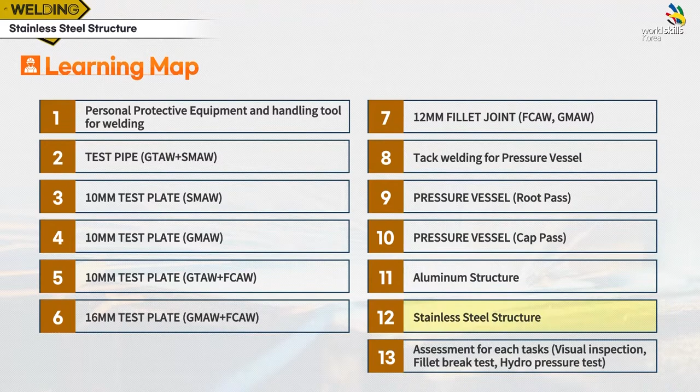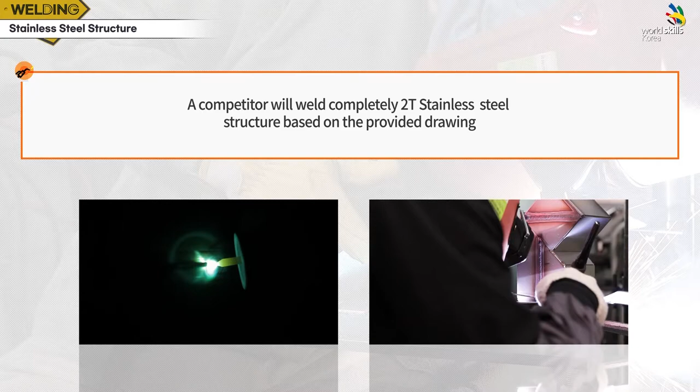Here's the training objectives on this task: to weld a stainless steel structure completely based on the provided drawing. Task: to make a stainless steel structure using 2 mm stainless material. Objective: to weld the stainless structure completely based on the provided drawing.

Goals: to strengthen welding skills for stainless structure. To make sound welds without any defects, such as porosity, burn-through, oxidation, etc. To interpret drawings accurately, including the front view, top view, side view, etc.

Materials: the stainless steel structure uses a 2 mm plate, 250 mm high, 200 mm long, and 200 mm wide. Welding process is GTAW stainless steel. Welding rod is T308, 1.6 mm and 2.4 mm. Shielding gas is argon 99.9%.

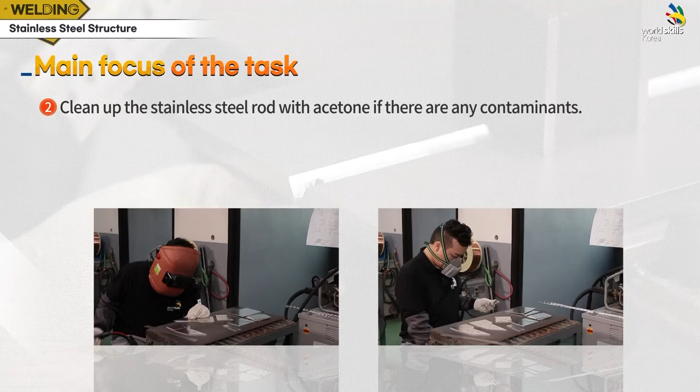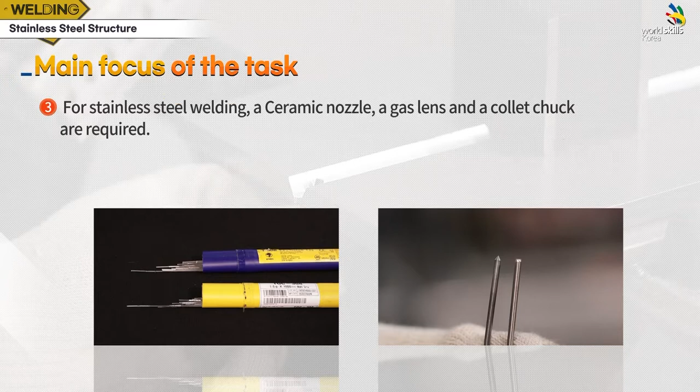Main focus of the task: make sure not to damage the base material. Clean up the stainless steel rod with acetone if there are any contaminants. For stainless steel welding, a ceramic nozzle, a gas lens, and a collet chuck are required. Prepare the electrode tip sharp as a pointed end.

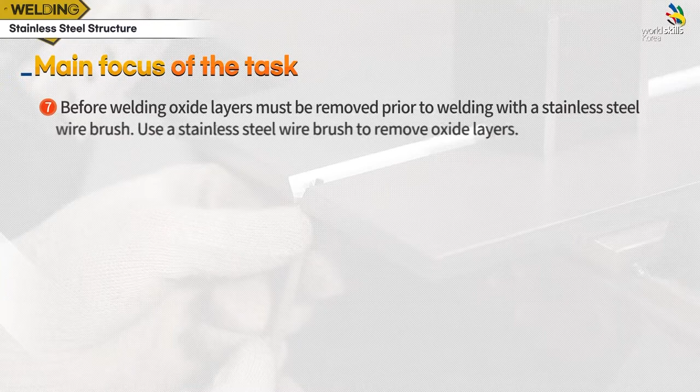Prepare water in a bucket bigger than the stainless steel structure and use it for cooling down the base material heated during welding. Make sure to weld the base material without any misalignment. Before welding, oxide layers must be removed with a stainless steel wire brush.

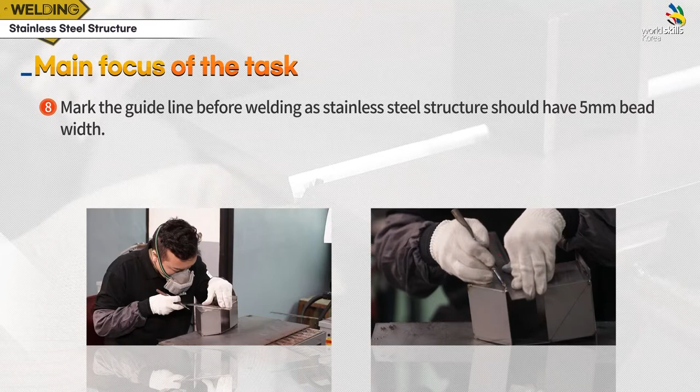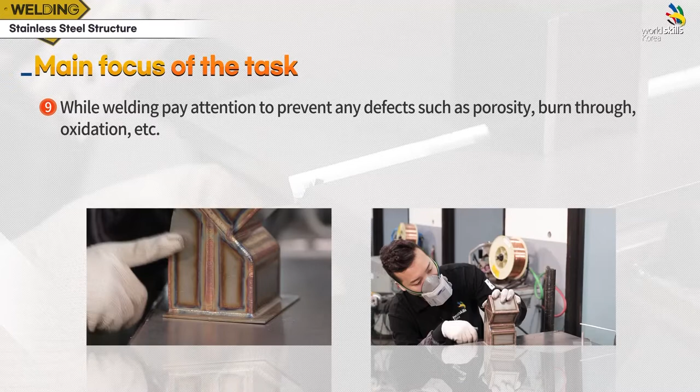Mark the guide line before welding, as the stainless steel structure should have a 5 mm bead width. While welding, pay attention to prevent any defects such as porosity, burn-through, oxidation, etc. Please check the preparations and tools for this training.

Precautions. Before starting welding, check if there is anything wrong with the material, such as incorrect size or machining errors. If so, request to replace it. Once welding starts, it is not allowed to replace the materials. A 2% thorium electrode is used for stainless steel welding. Use an electrode sharpened to a pointed end because DC is used for stainless steel welding.

When tack welding, alignment is more important than anything else. Check for any misalignment with a steel ruler and repeat checking even after the tack welding is done. When the tungsten electrode touches the base material, it will get a blackish oxidation. Keep the tungsten electrode away from the base material. Keep only about 1 to 2 mm distance when making tack welds; if it's too far, it will not penetrate.

Do not make any gaps between the bottom plate and the structure. Hold tight to make tack welds without any gap. Before getting into the main welding, remove the oxide layers thoroughly with a stainless steel wire brush.

Argon gas purging should be supplied to the inside of the stainless steel structure to protect the welding beads from oxidation. Use 99.9% argon gas and supply it to the inside of the structure during the entire welding. The purging gas flow rate to protect the structure inside is 5 liters per minute. For the first weld, the shielding gas should be provided before starting the arc. When the weld joint is shielded by the gas, proceed with welding by starting an arc.

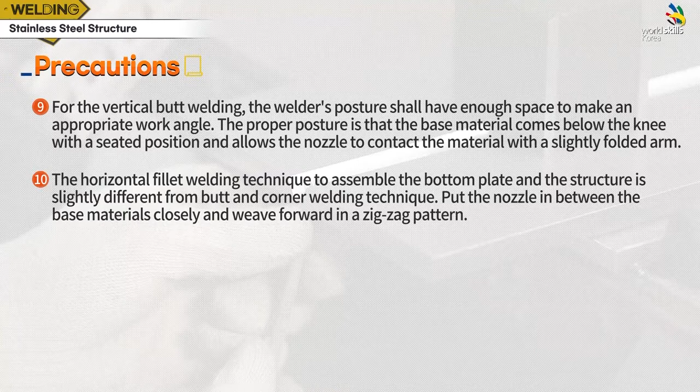The horizontal fillet welding technique to assemble the bottom plate and the structure is slightly different from the butt and corner welding technique. Put the nozzle in between the base materials closely and weave forward in a zigzag pattern. After finishing the arc, do not lift up the welding torch until the gas post flow has finished.

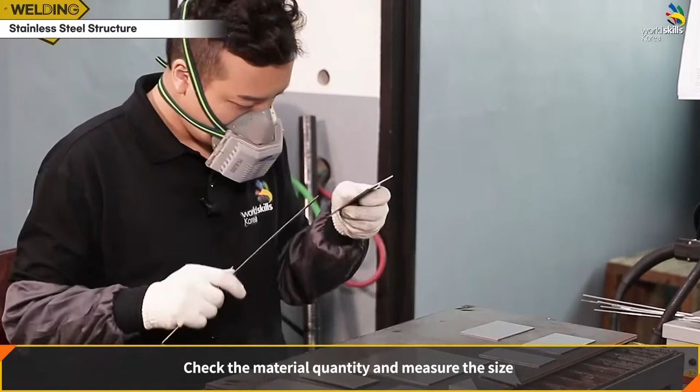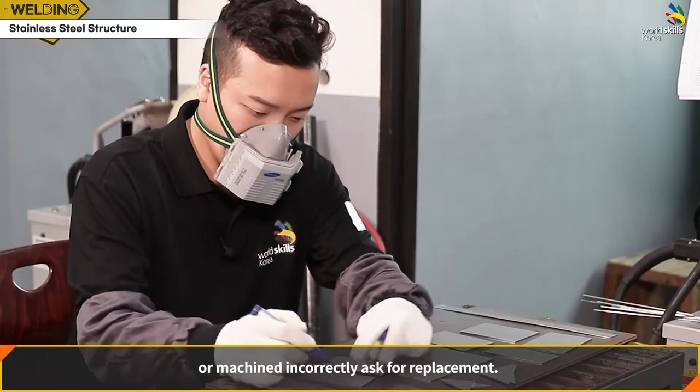Preparation of base material weld joints. Review the drawing and confirm all parts of material are given. Check the material quantity and measure the size. Prior to welding, if there is any material with the wrong size or machined incorrectly, ask for replacement. After starting welding, it is not allowed to replace the parts.

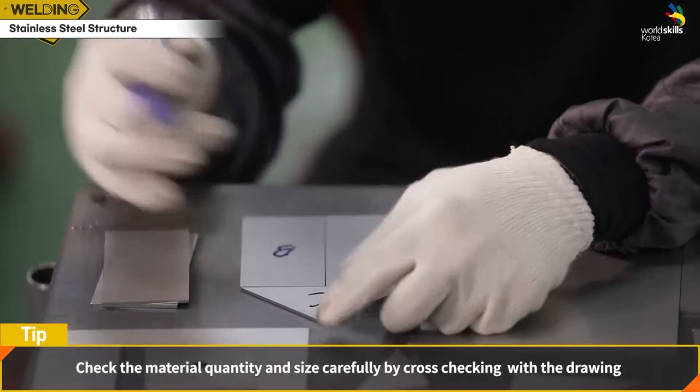Check the material quantity and size carefully by cross-checking with the drawing. Mark which part of the structure each material corresponds to against the drawing. Mark the location directly on the materials according to the drawing with a paint marker to avoid confusing the front and back panels of the plates.

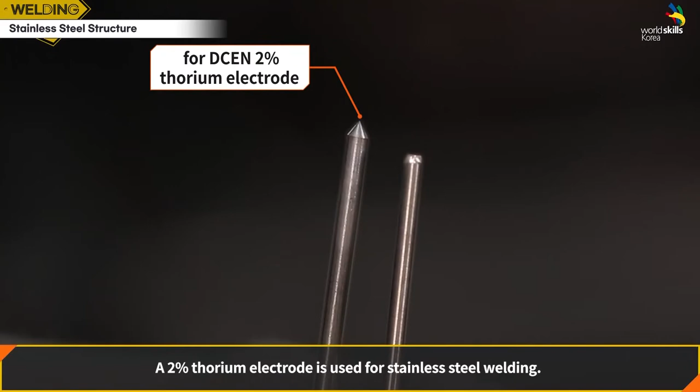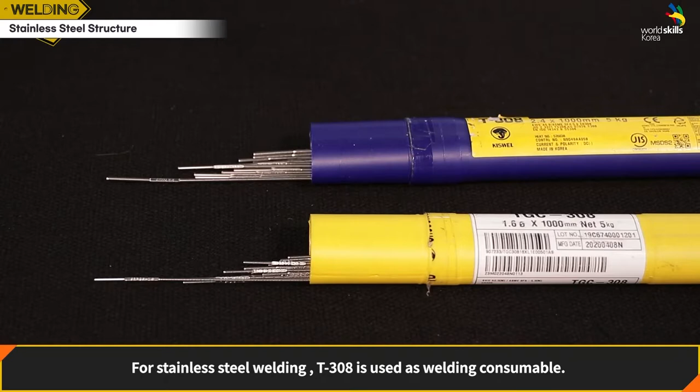A 2% thorium electrode is used for stainless steel welding. Because DCEN is used, sharpen the electrode tip to a pointed end. For stainless steel welding, T308 is used as the welding rod. It shows an appropriate amount of ferrite content when deposited, so it has excellent crack resistance and mechanical properties. For this task, 1.6 and 2.4 mm filler metal will be used.

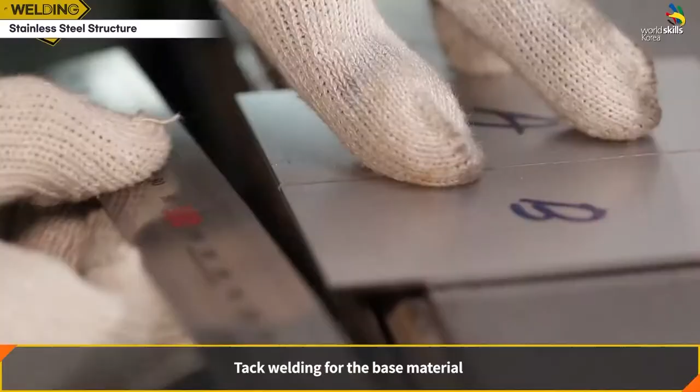Tack welding for base material. While tack welding, maintaining an alignment is the most critical. Check the alignment with a steel ruler and make tacks at both ends. Set the current about 80 ampere. The gas flow rate 10 liters.

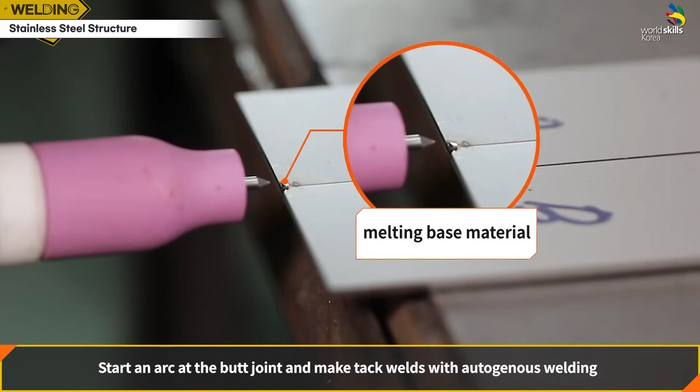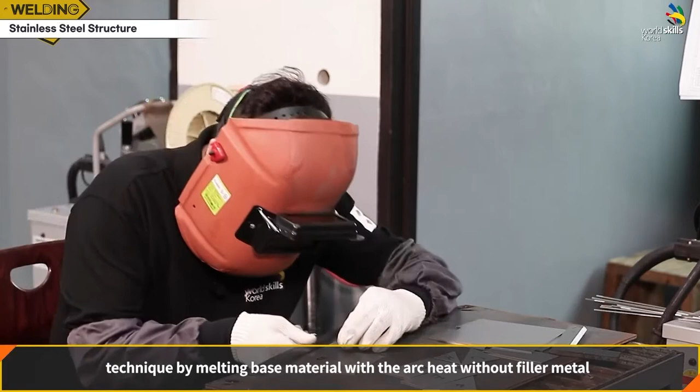Make tack welds according to the drawing with provided materials. Start an arc at the butt joint and make tack welds with autogenous welding technique by melting base material with the arc heat without filler metal. After tack welding, check if the level of the base material is even. Check repeatedly if there is any distortion with a steel ruler.

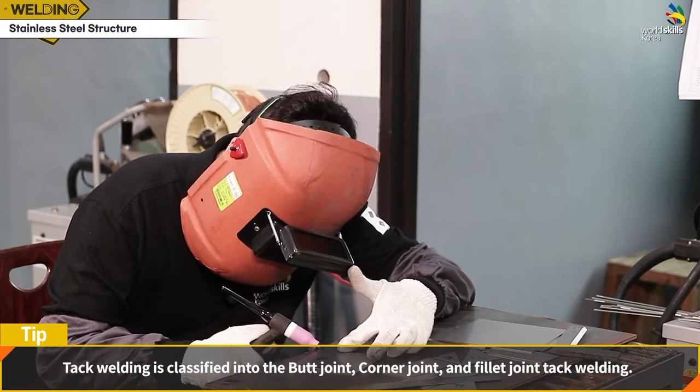Tack welding is classified into the butt joint, corner joint, and fillet joint tack welding. Tack welding from a side view, front view, and top view in order. After tack welding, check if there are any gaps between the base materials. It is important to make an alignment and keep no gap to avoid a burn-through.

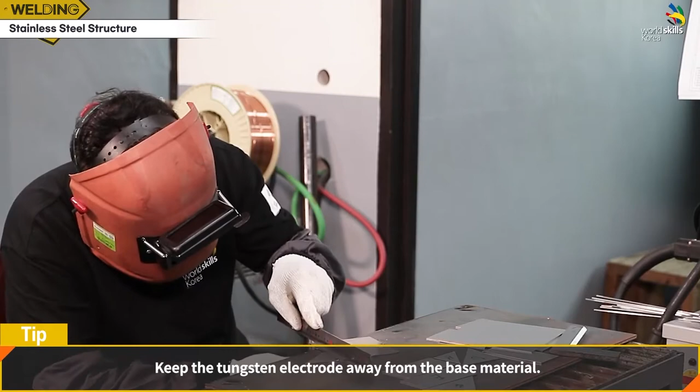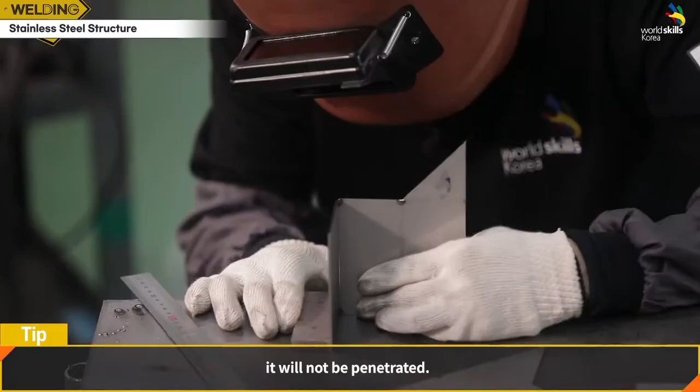When a tungsten electrode touches the base material, it will get a blackish oxidation. Keep the tungsten electrode away from the base material. Keep only about 1 to 2 millimeter distance and make tack welds, because if it's too far, it will not be penetrated. For corner joint, tack weld precisely to avoid the gap between the plates.

Tack weld holding the plates with a hand and then align the right angle with a square gauge. If it's not a right angle, correct the angle by bending or flattening material with hands. The assembly sequence is similar to the one for aluminum welding.

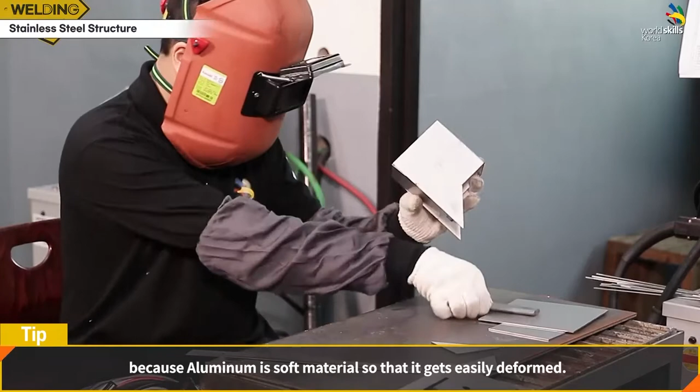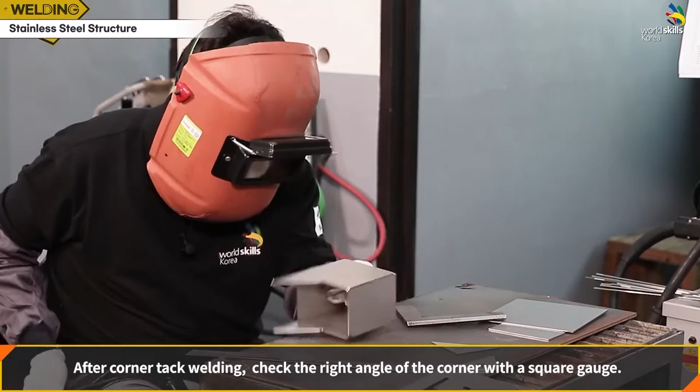The welder is welding tacks by holding material without any special fixture at the moment. Fixtures like G-clamp could be used, but pay extra care because aluminum is soft material so that it gets easily deformed. After corner tack welding, check the right angle of the corner with a square gauge. If it's a butt joint tack welding, make 2 tack welds at the end and middle, respectively. Whenever tack welding finishes, check the right angle of the corner with a square gauge.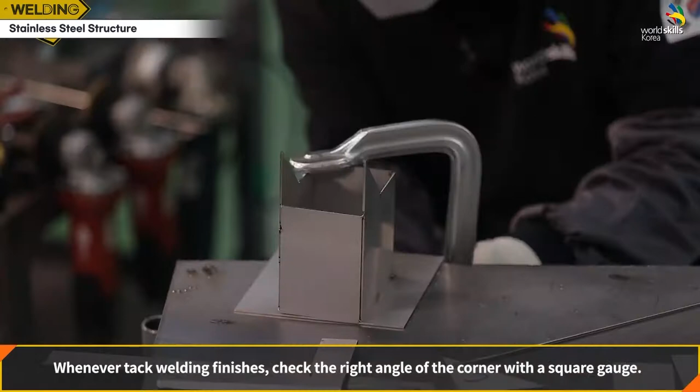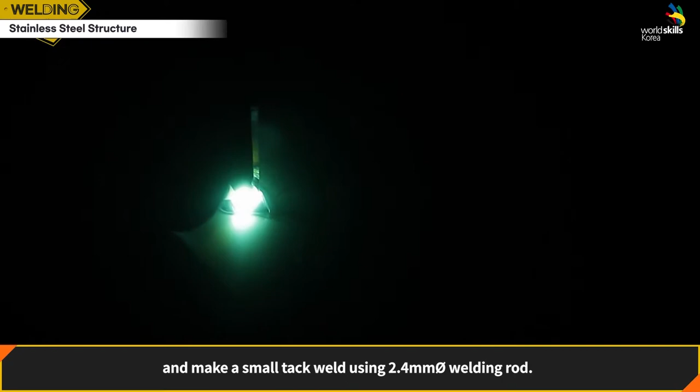In order to tack weld the bottom plate and the structure, hold the structure with a G-clamp. Do not make any gaps between the bottom plate and the structure. Hold tight to make tack welds without any gap. First, preheat the bottom plate with the arc heat, then move up the arc and make a small tack weld using 2.4 millimeter welding rod. When tack welding the base plate, it is necessary to wait 4 to 5 seconds until the molten metal cools down before removing the torch.

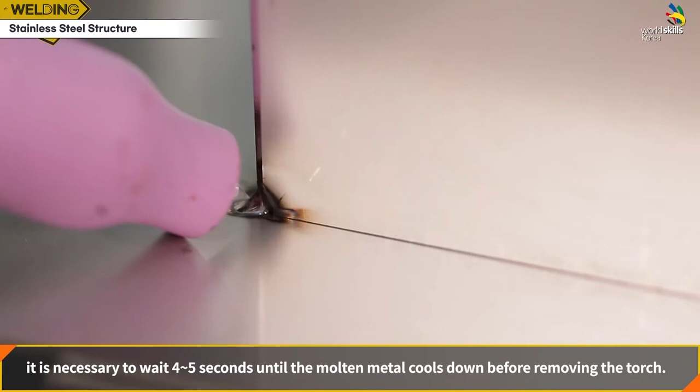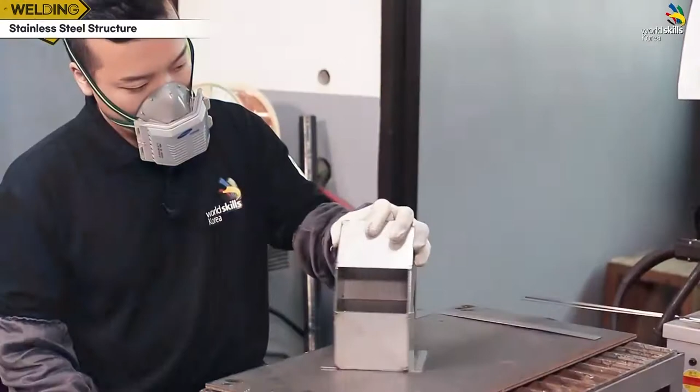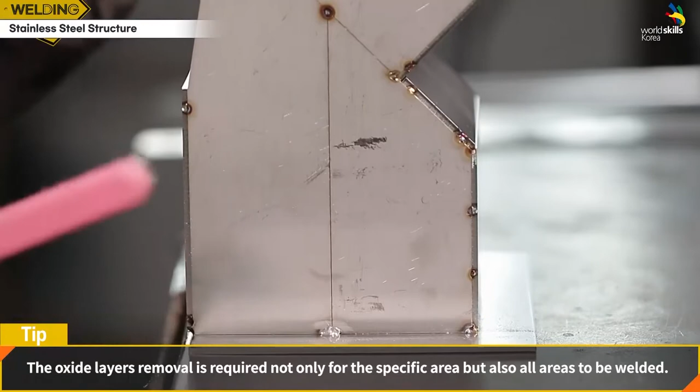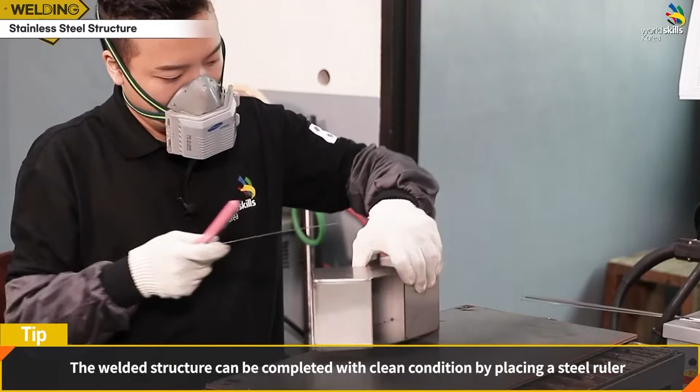Stainless steel welding. The oxide layers must be removed prior to welding with a stainless steel brush. Stainless steel brushing can remove not only the oxide layers, but also other contaminants such as cutting fluid, oils, and so on. The oxide layer removal is required not only for the specific area, but also all areas to be welded. Do not miss the butt joint part. The welded structure can be completed in clean condition by placing a steel ruler next to the weld joint considering the bead width when removing oxide layers.

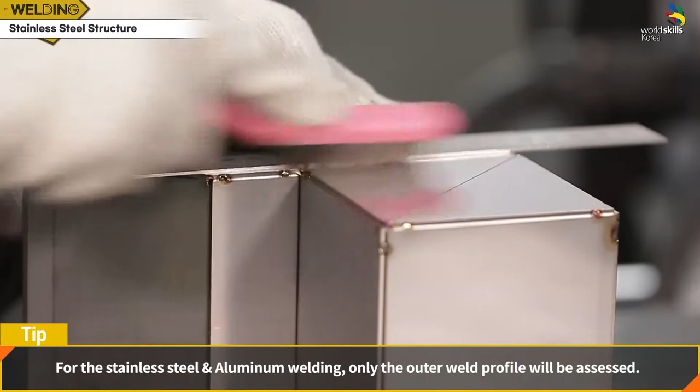For the stainless steel and aluminum welding, only the outer weld profile will be assessed. Pay special attention to the outer weld profile and other tasks. After removing aluminum oxide layers, mark the guideline with a marking needle considering the bead width. Mark the guideline for butt joint and fillet joint, except corner joint, since for the corner joint, the edge of material will be a guideline for welding. The marked line for the butt joint is the guideline in order to align the uniform bead width.

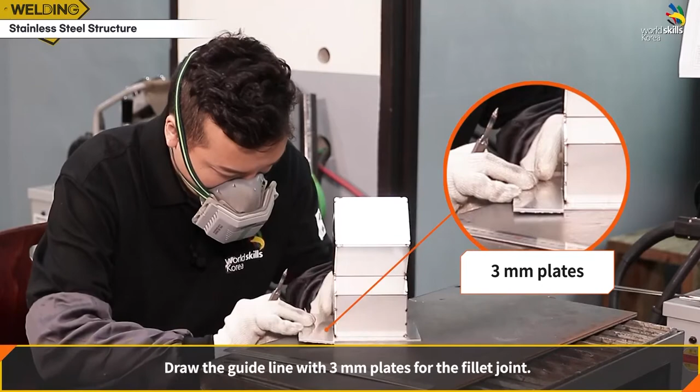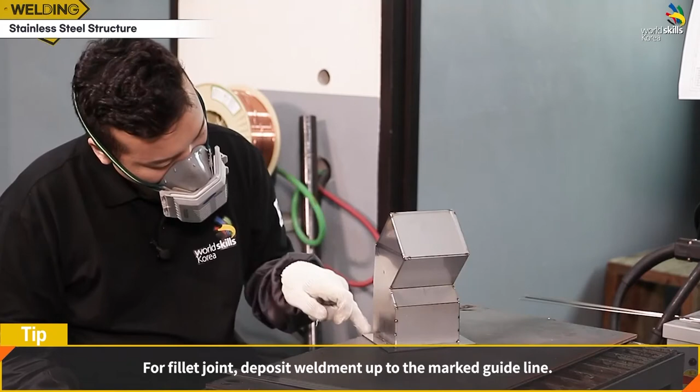Draw the guideline with 3 millimeter plates for the fillet joint. For fillet joint, deposit weldment up to the marked guideline. When weldment didn't deposit up to the guideline, a competitor will lose marks for undersize of fillet during the marking process.

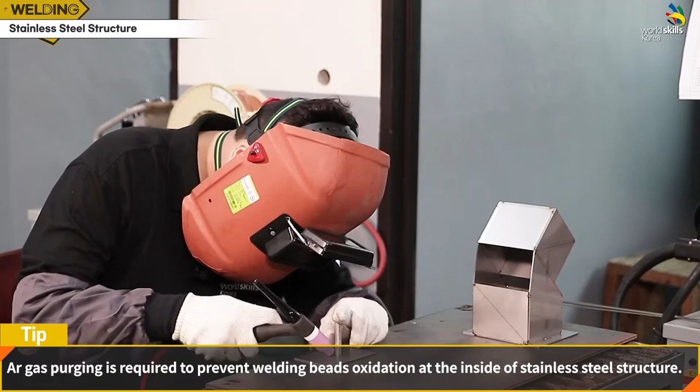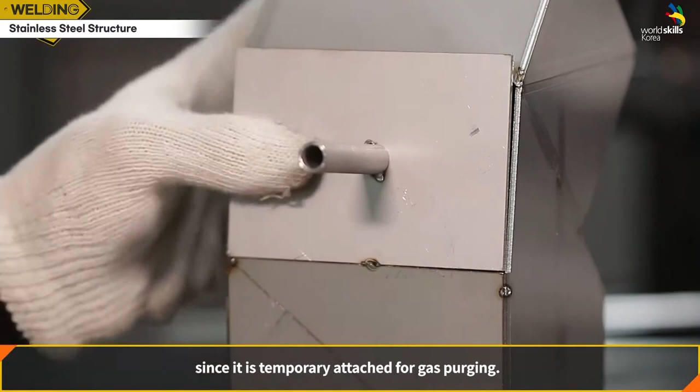Before starting this welding, stainless steel welding requires a shield work to prevent oxidation of the back bead. Supply 99.9% argon gas to the structure inside during the entire welding. Insert the tube into the opening in the cover plate. Make tack welds at the cover plate instead of complete welding, since it is temporarily attached for gas purging. This cover plate will be removed after welding completion. Fix it only to the extent that it doesn't fall off. Connect the argon gas tube to the tube connector.

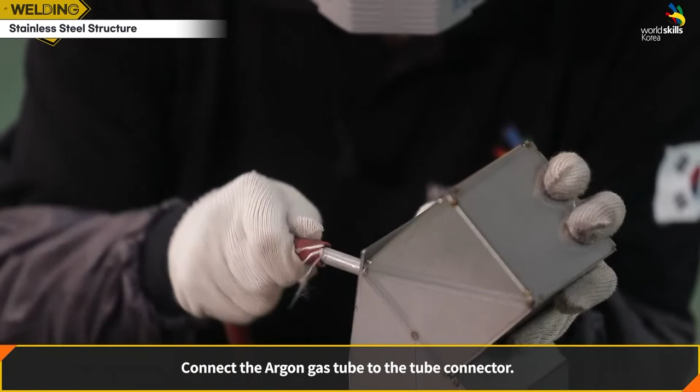Gas flow rate for argon purging is 5 liters per minute.

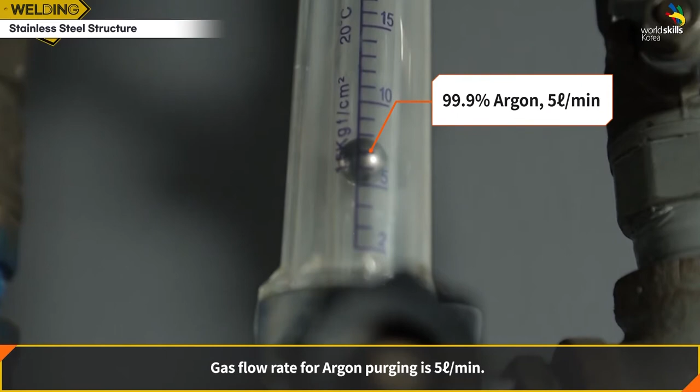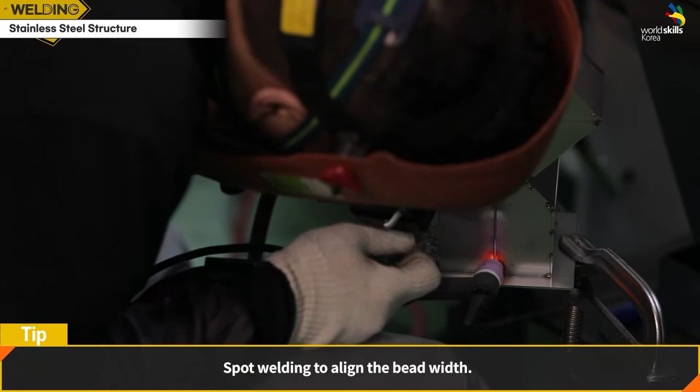Vertical butt welding. Start an arc from the bottom plate and move it to the top while welding. In the beginning, make 2 to 3 spot welds and keep the short arc length. Align the bead width with spot welds. A welder has drawn a 5 mm bead width line.

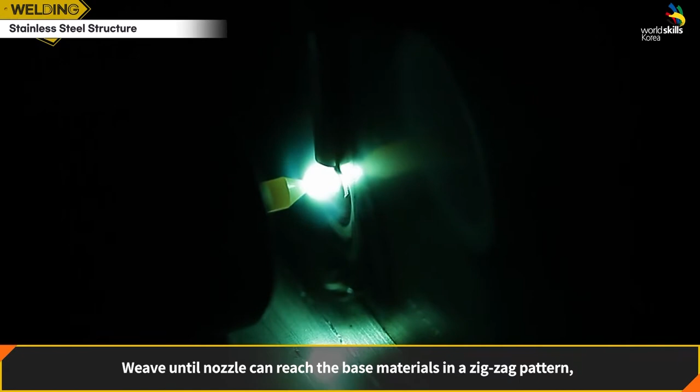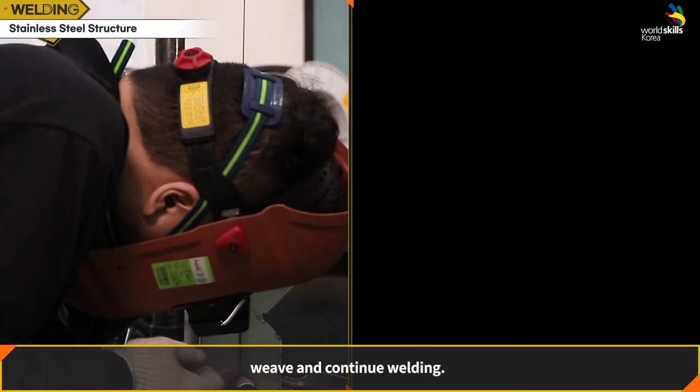Weave the nozzle until it can reach the base materials in a zigzag pattern and then pause the arc. When the posture is stable and the torch can maintain the travel angle, weave and continue welding. The proper posture is that the base material comes below the knee with a seated position and allows the nozzle to contact the material with a slightly folded arm. Continue spot welding until the torch work angle can be maintained.

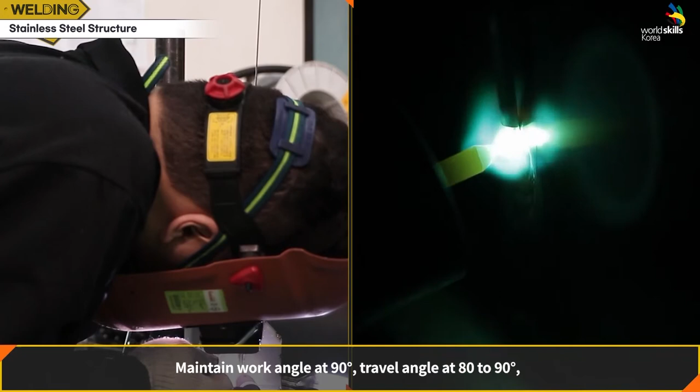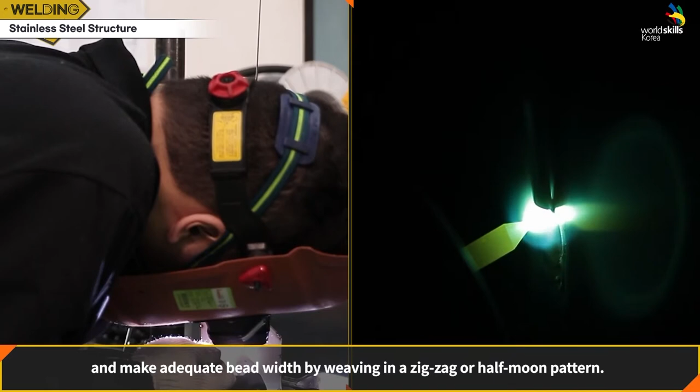Maintain work angle at 90 degrees, travel angle at 80 to 90 degrees, and the tilting angle of the welding rod at 10 to 20 degrees from the surface. Keep the short arc length so that the electrode does not touch the base materials and make adequate bead width by weaving in a zigzag or half-moon pattern. At this time, continue welding by feeding and pausing the filler metal repeatedly in front of the arc instead of feeding continuously.

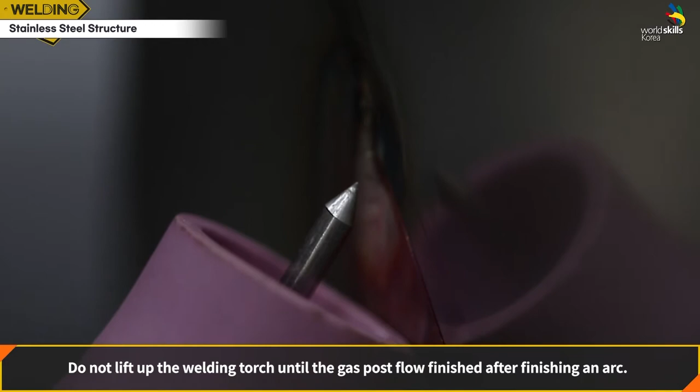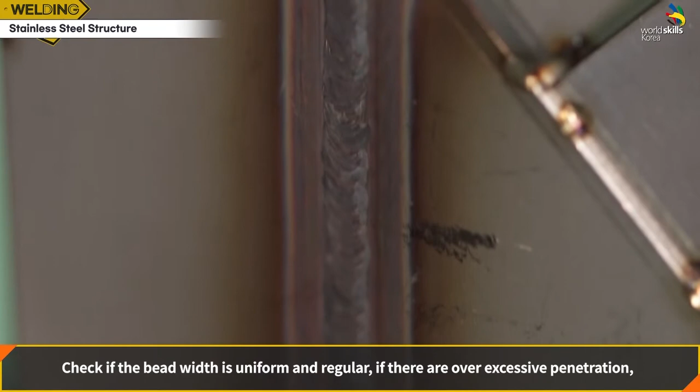Finish the endpoint with spot welding 5 mm ahead of the endpoint. Do not lift up the welding torch until the gas post flow has finished after finishing an arc. Check if the bead width is uniform and regular, if there is excessive penetration, and if there is any porosity or contaminant inclusion.

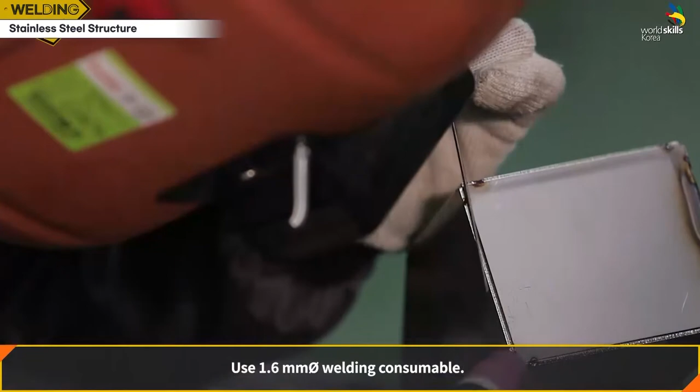Inclined vertical corner joint welding. Use 1.6 mm welding rod. With 2.4 or 2.6 mm, it may turn out too thick a weld bead. Use 60 to 65 ampere current. Continue welding by feeding and pausing the filler metal repeatedly in front of the arc instead of feeding continuously.

Maintain work angle 90 degrees, travel angle 75 to 85 degrees, and the tilting angle of the welding rod shall be around 10 to 20 degrees along the welding line. Depending on the welder's skills, the current can be partially adjusted. If the welding speed is fast, use high current. If it's not, lower the current a little bit. Do not lift up the welding torch until the gas post flow has finished.

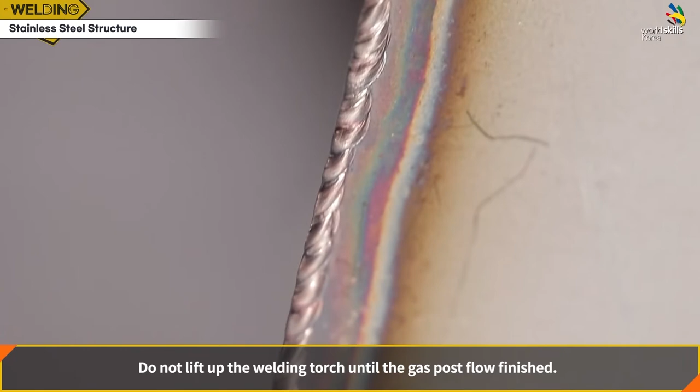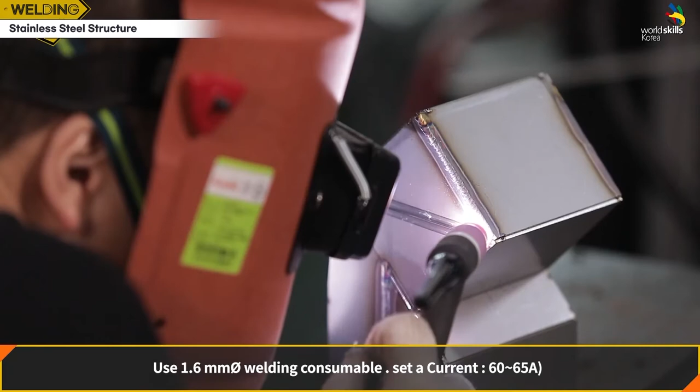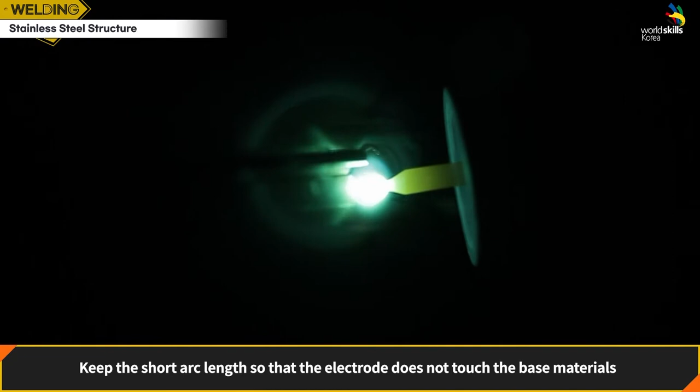Horizontal butt welding. Use 1.6 mm welding rod and set the current at 60 to 65 ampere. When performing GTAW welding, the shielding gas must come out first before starting the arc. Start an arc after shielding the weld joint with the gas. Keep the short arc length so that the electrode does not touch the base materials, and make adequate bead width by weaving in a zigzag or half-moon pattern. Continue welding by touching and pausing repeatedly in front of the arc instead of feeding continually.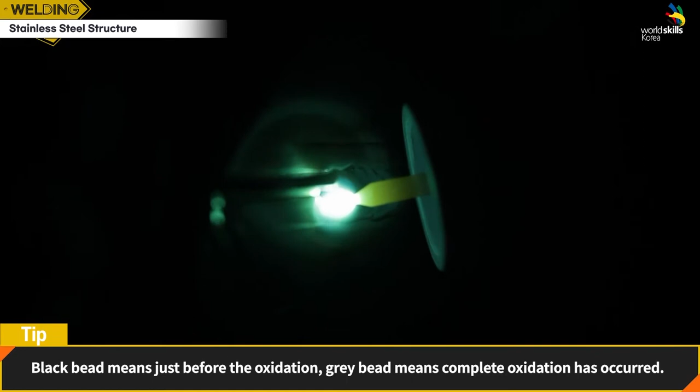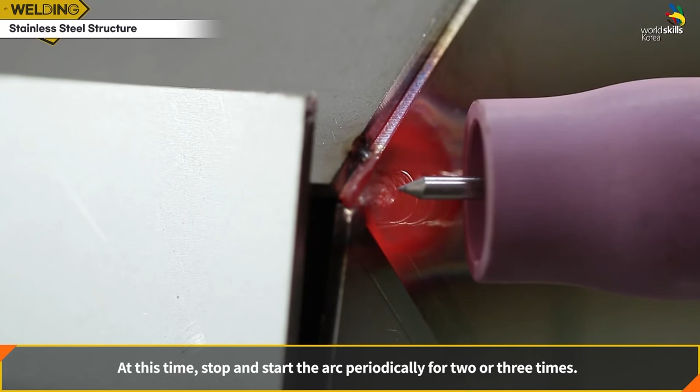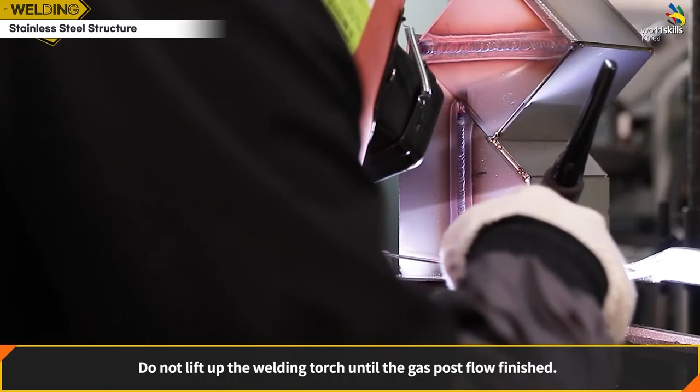Horizontal fillet welding. Let the shielding gas come out first in the beginning. After that, start an arc and make spot welds. Start welding by making spot welds along the guideline. After that, when the material is melting, proceed welding by keeping the bead width adequate with a zigzag weaving pattern. The welder uses 2.4 mm welding rod. Fillet welding technique is a little different from butt or corner joint welding.

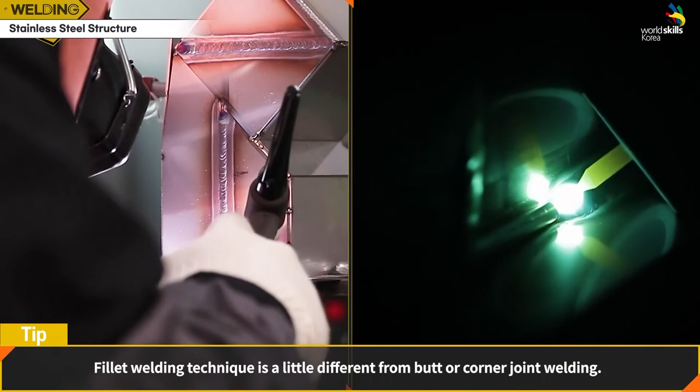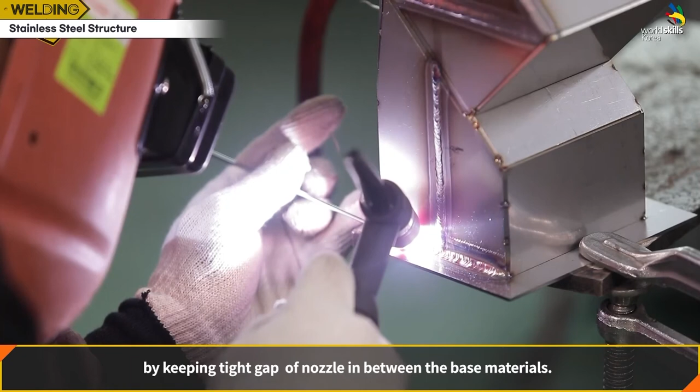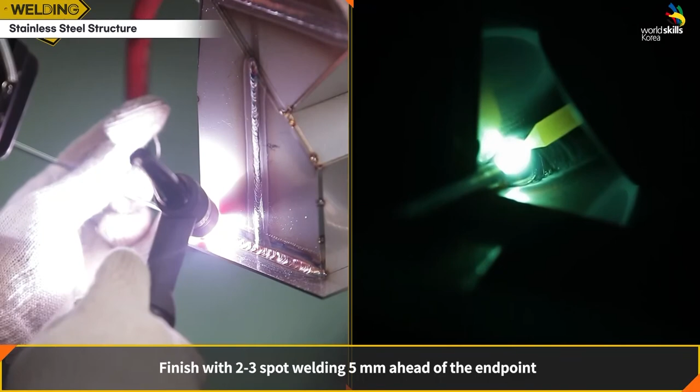Proceed welding with a zigzag weaving pattern by keeping a tight gap of the nozzle between the base materials. A constant bead line can be made when weaving by allowing the molten puddle to reach the marked guideline. Finish with 2 or 3 spot welds 5 mm ahead of the endpoint, because the closer to the endpoint, the more heat is accumulated. Do not lift up the welding torch until the gas post flow has finished.

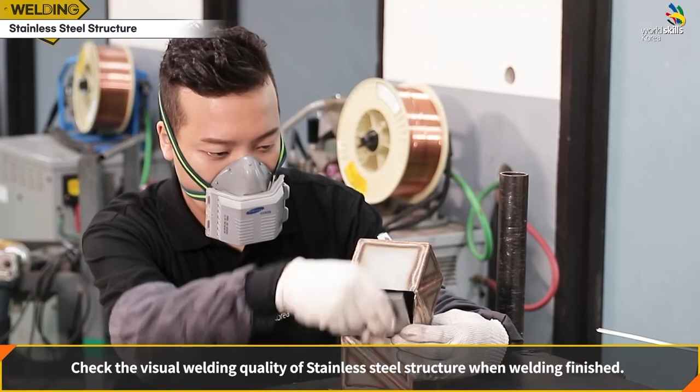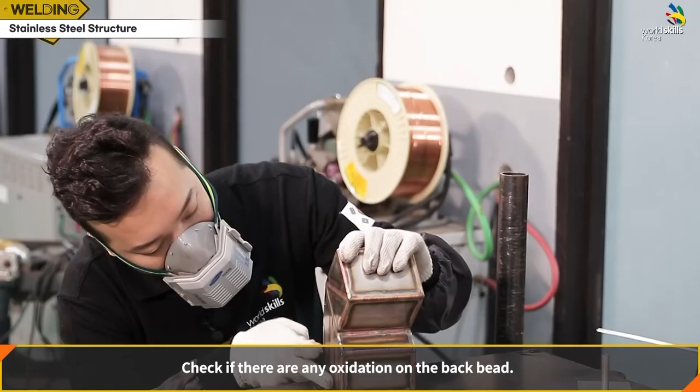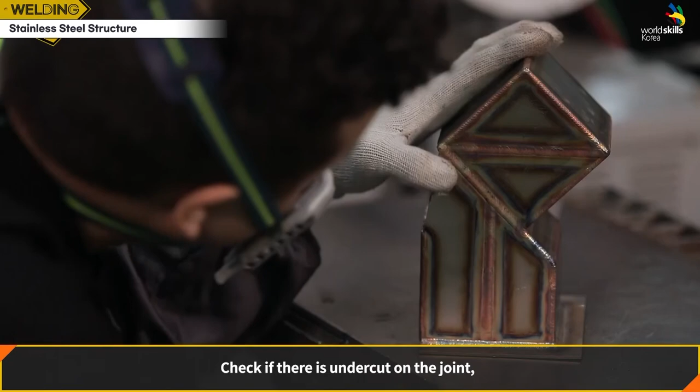Check the welding quality. Check the visual welding quality of the stainless steel structure when welding is finished. Remove the tacked cover plate to check the back bead welding quality. Check if there is any oxidation on the back bead. Visual inspection. Check if the bead width is uniform and regular. Check if there is any excessive bead reinforcement on the weld joint and porosity or contaminant inclusion on the surface. Check if there is undercut on the joint, the fillet size meets the specification, and there is burn through.

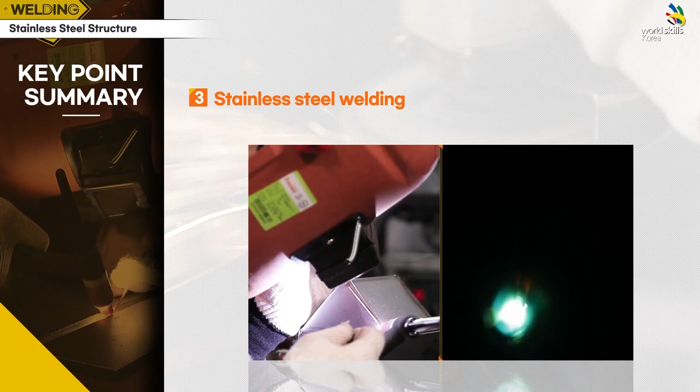Please check the key points of the task you have done this time. So far, we have learned about welding of stainless steel structures.